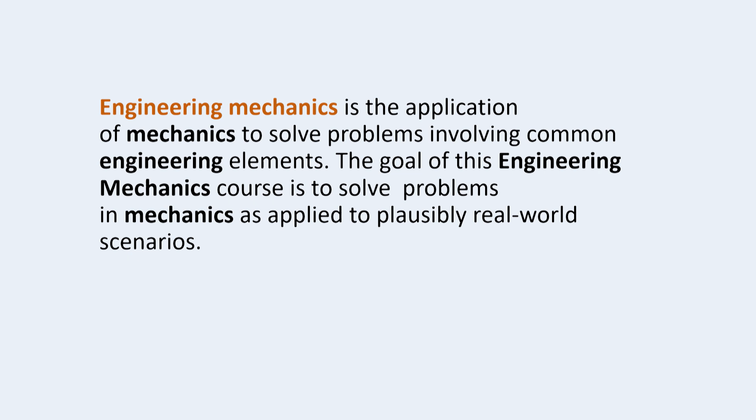So engineering mechanics is a very important course for engineering in the departments of civil, mechanical, aero, chemical, electrical and so on. Engineering mechanics is the application of principles of mechanics to solve problems involving common engineering elements, in the sense of rods, beams, wheels, plates, and so on, because together they make the structure, together they make the machine.

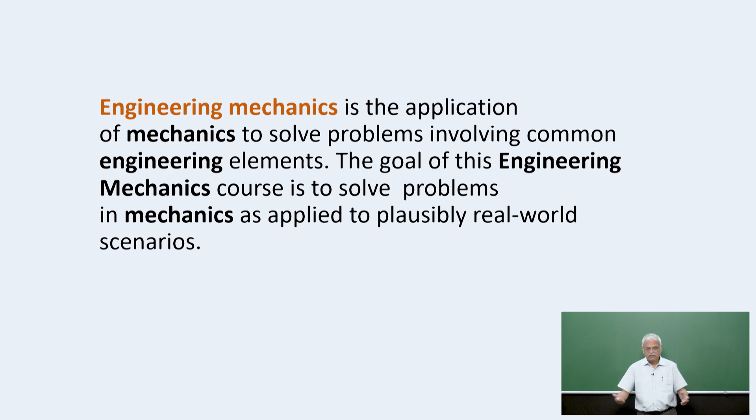And the goal of this course is to solve problems in mechanics as applied to plausibly real world scenarios. So essentially this is the application of principles of mechanics to many of the engineering problems. And this forms a very core course in engineering, and so I just gave the course content here.

The course content has many chapters or topics, starting from equilibrium of rigid bodies in the static case, and then we also deal with the free body diagrams, and the system of connected bodies is the final goal for us, and of course continuous systems. Then we deal with the energy in a conservative system for both rigid bodies and particles. Then there are other principles such as virtual work, which is the other side of the mirror of the basic Newtonian mechanics.

Then we go on to the various coordinate systems, cylindrical coordinates, spherical coordinates, and moving axes for the application to motion. Then, from simple particles, we move on to rigid bodies, and rigid bodies have their own extra difficulties and aspects, and we deal with them at the 2D and at the 3D level also. Going from 2D to 3D is a big jump, and there are many aspects that need to be considered. So this is in a nutshell what we are going to deal with.

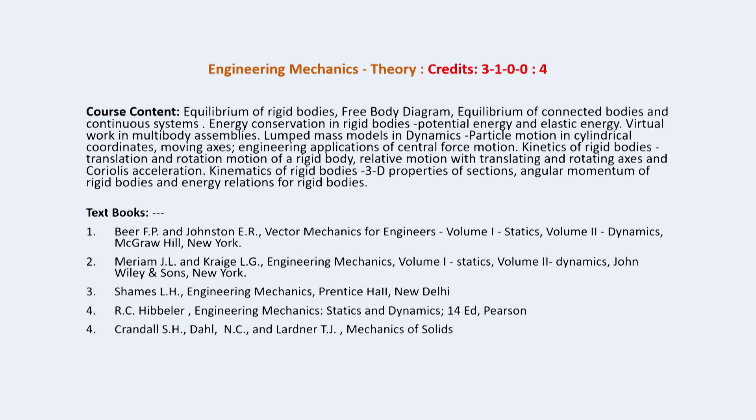Usually we teach it over 14 weeks in the institutes, and it has 3 lectures followed by 1 tutorial in the week. So it's essentially about 40 lectures with 14 tutorials in between. So it's a very rigorous course, and one should pay full attention to it. It is usually 3-1-0-0, three lectures and one tutorial. And of course, there's no lab. Usually it's given 4 credits. So we'll deal with engineering mechanics for some 39, 40 lectures in the coming weeks. Okay.

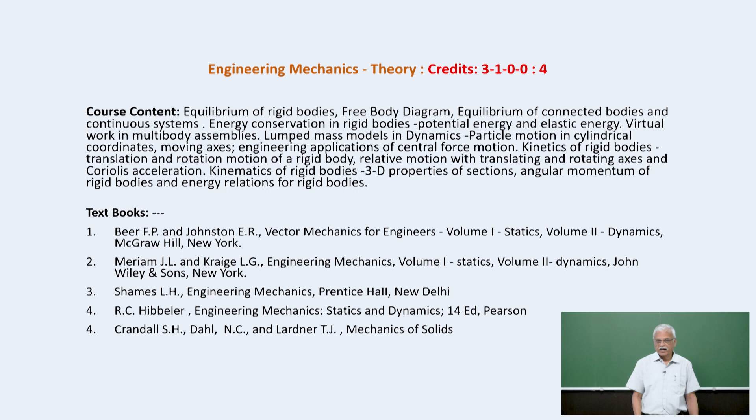Let me also tell you, the contents of this course, which I have shown there, are very general and are prescribed in various institutes, colleges or universities. In general, we can say this covers some 80 to 90%. Sometimes it's more, and it is a little more than what is prescribed in many of the universities. In fact, that is the better part of this. So if you have full command of this course as it is given here, you can say that you have understood dynamics or engineering mechanics at this level to a very good extent.

It looks like a static structure, it doesn't move, but while designing these kinds of structures, not only do they have to take care of all the loads coming on each and every component, but also the kinds of loads. Not only its own self-weight and the weights of people transiting through it, as well as many equipments, but also other kinds of loadings like wind loading, and definitely seismic loading, the vibration which comes during earthquake movements. All these things have been taken into account in designing the whole structure, because it involves not only the safety of the building itself, but the safety of the many people who occupy it.

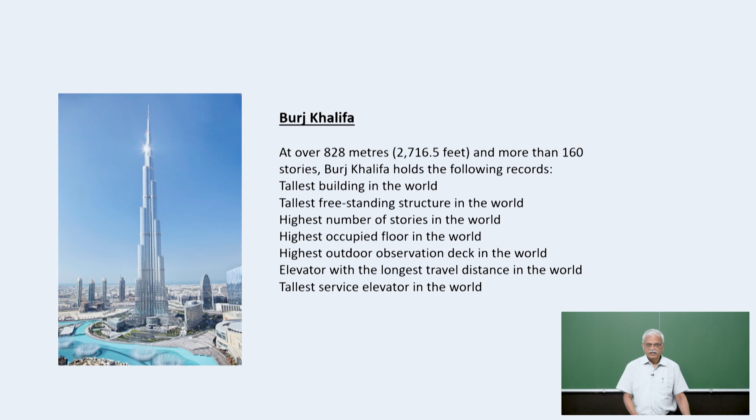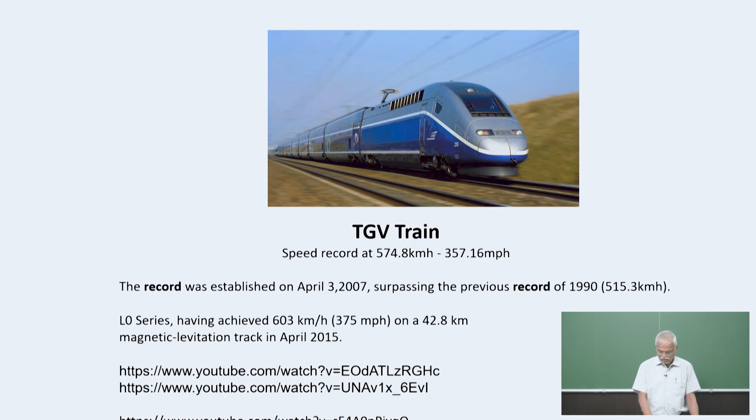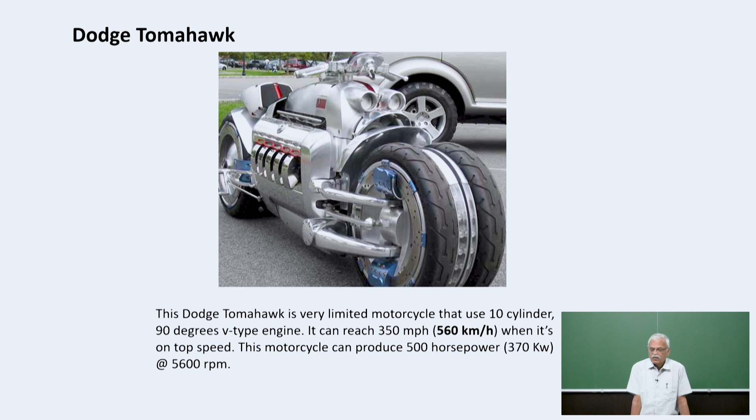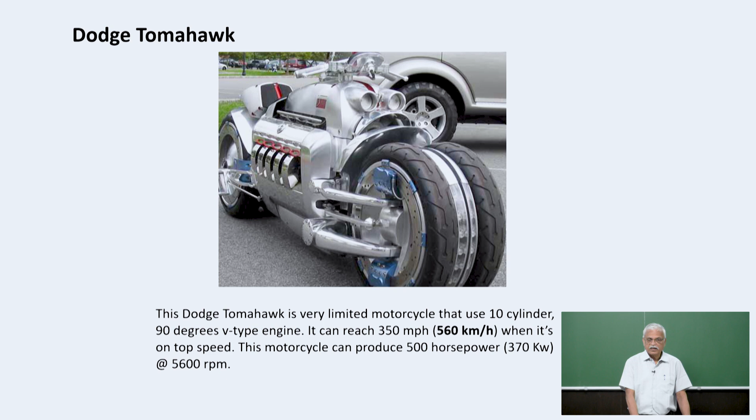And on the other hand, we also have motorcycles, like the Dodge Tomahawk high-speed motorcycle with 10 cylinders, and it can reach a speed of 560 kilometers. So you can imagine how much design analysis would have gone into this to make each and every component work to satisfaction.

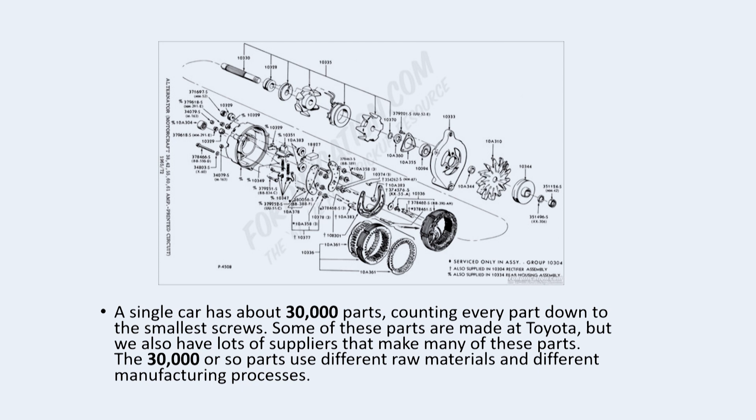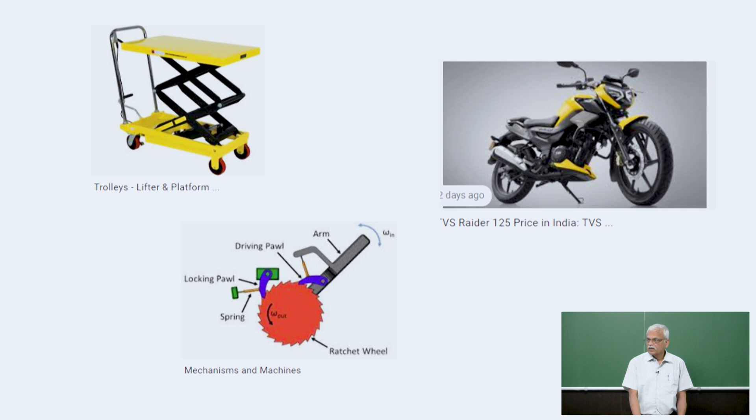And statics is the situation where the motion is not very much involved and it's not significant, like a state of rest, or maybe the motion is of very low velocities or low accelerations. But then there are machines or bodies which are subjected to high accelerations during their course. In fact, they're meant to go through a lot of acceleration. So just to have some idea about the magnitude of acceleration in various

situations. For example, for people, g is the acceleration due to gravity, the standard measurement, and 0.001 g, that means 0.1% of g, is perceptible by people. And at 0.02 g, if a person is subjected to this kind of acceleration, people may fall. For example, if somebody is standing and suddenly a gust of wind comes, and an acceleration of 0.02 g is impinged on his body, then he will lose balance.

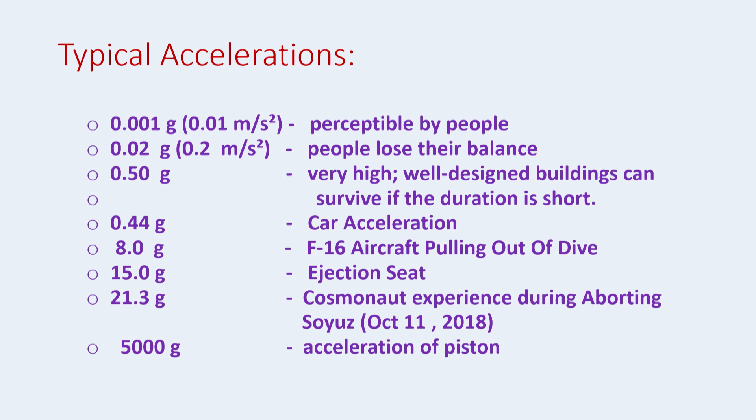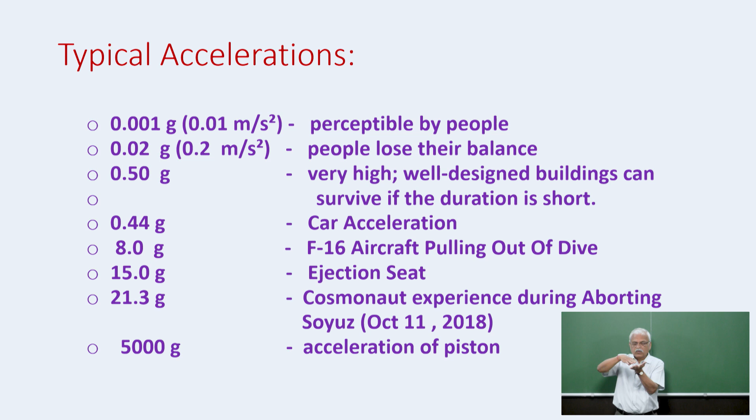The third one, 0.5 g, is the maximum acceleration a building can be subjected to during an earthquake. While the base is moving horizontally back and forth, the maximum acceleration the building can sustain is about 0.5 g. Anything more than that, the building will collapse, because buildings have a lot of bricks and mortar, and those joints cannot take more than 0.5 g. And the car acceleration is about 0.44 g.

And you would have seen fighter aircraft, which undergo high g during acceleration, deceleration, as well as taking a curved path. The maximum a person can sustain is about 8 g. Anything more than that, he may lose consciousness, which they call blackout, and he will lose control. So that is the maximum acceleration a person usually can sustain without losing consciousness.

And then of course, there are the ejection seats in the fighter plane, by which they evacuate the plane in case of emergency. That is about 15 g. He has to come out of the plane for safety reasons, and just for a short time he can sustain it. He may lose consciousness, but not for long. And then he'll come out and land using parachutes. And 21.3 g is what cosmonauts experienced during aborting. In space vehicles, they are subjected to very high accelerations during aborting.

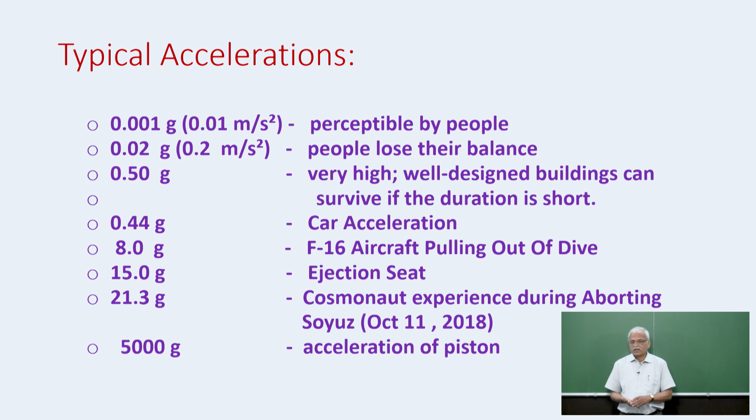And finally, these seem to be very big, but if you come to machines, there are high-speed reciprocating engines which run at 5,000 rpm or 7,000 rpm. There, the piston, which has a reciprocating motion, is subjected to an acceleration of 5,000 g. So this is a very high thing. That acceleration obviously is obtained by the application of force, so you can imagine what kind of forces the pistons are subjected to. So when you design these things, you should definitely make sure that the bodies can sustain that kind of loading, forces.

So this is how we can see the importance of mechanics, either from the statics point of view or from the dynamics point of view, what kind of forces they are subjected to. So we can have some idea of this. Okay, so the mechanics which we are going to deal with has different classifications.

So of course, I already mentioned that there is statics and dynamics, which I did not mention here. Statics is when the motion or the accelerations which are involved are not there, or even if they're there, they're negligible. So static structures are static. There are so many static mechanisms.

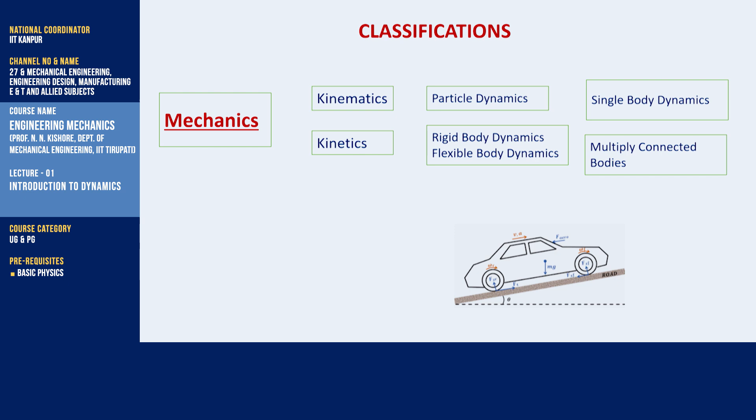Okay, so can we consider a rigid body as a particle in some situations? There are two important aspects for this. The first one is that if the rigid body is not having any rotation, that means it's moving parallel to itself like this, then we can consider it to be a particle, because no rotation is coming into the picture.

You can treat it as a particle. So that means when rotations are not important or they do not enter the analysis, then you can consider it to be a particle. But on the other hand, if you consider it to be also having a rotational thing, then it should be considered as a rigid body.

So interestingly, there are cases where a body can be considered as a particle or should be considered as a rigid body. For example, if you take an aeroplane which is going over long distances smoothly, say Delhi to London or so, in which case more or less its orientation doesn't change, or even if it changes slowly, it goes over long distances of thousands of kilometers without too much rotational motion. So in an overall sense, considering the overall drag, and if you want to find out how much fuel is consumed and so on, in that context it can be considered as a particle.

But on the other hand, if you take the wing and the tip of the wing, which can have displacement or deflections of half a meter or so, if you want to consider that motion, with respect to the size of the wing the motion of the tip is considerable, because it also has kind of up and down rotational motion and so on. Their vibrations, for example. So it should be considered as a rigid body, not necessarily rigid. Okay, so like this, a thing which you consider as a particle or a rigid body.

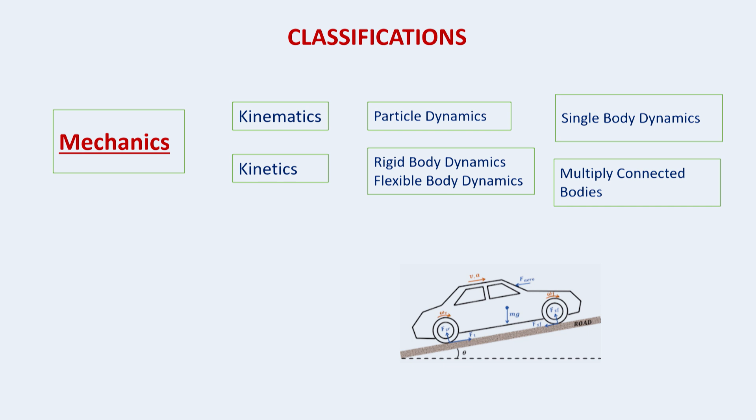So it's very interesting that, I'll come back to this one, I just want to show you that if you look at Newton's laws of motion, the basic laws, the first law talks about how a body continues to be in a state of rest or uniform motion unless it is acted upon by forces.

So essentially there are many slight differences in the definitions. The velocity of a particle can only be changed by the application of a force. So if a force acts on a particle, then obviously its velocity changes. The second law talks about the relationship between the force and change in velocity, which is given by acceleration. So it is F is equal to ma.

And the third one talks about the interaction between bodies. Actually, any force here in the world is because of the contact nature. So if two bodies are pressing each other, there's a contact force, or even the weight which is acting on the body is nothing but an interaction between the body and the earth. So everything is contact forces. One is called the action, the other one is called the reaction. So action and reaction appear as pairs, and they're equal and opposite. So you know these three laws.

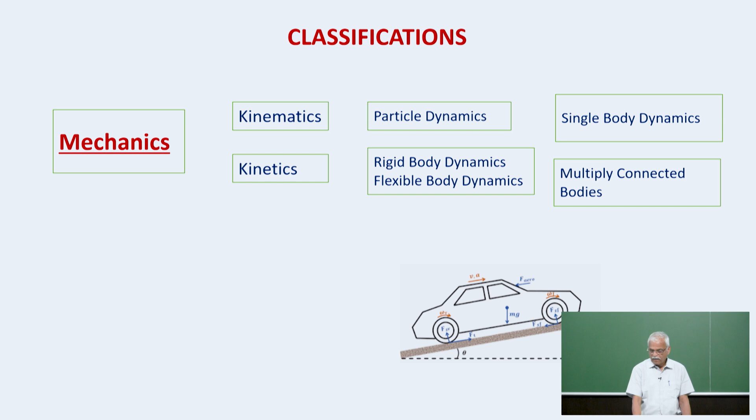So we develop it from particle to multiply connected bodies, and since we know the forces at multiply connected bodies, we'll go back to a single body and probably to internal forces, which we don't do at this stage. So this is how the various stages of understanding the behavior of bodies are classified.

So just to put it in a nutshell again, in this course first of all we talk about static equilibrium, without any motion. We consider the static equilibrium of bodies or multiply connected bodies, a system of bodies, and try to understand the various forces acting. After that, we move on to the kinematics of the particle, how the motion can be described in various reference coordinate systems: Cartesian, cylindrical, spherical, sometimes moving coordinates.

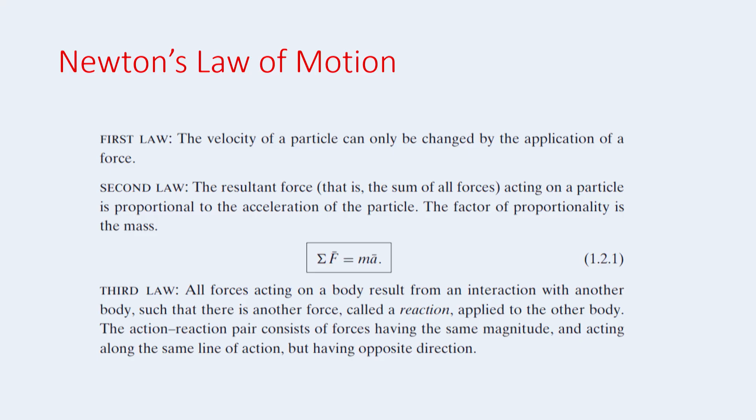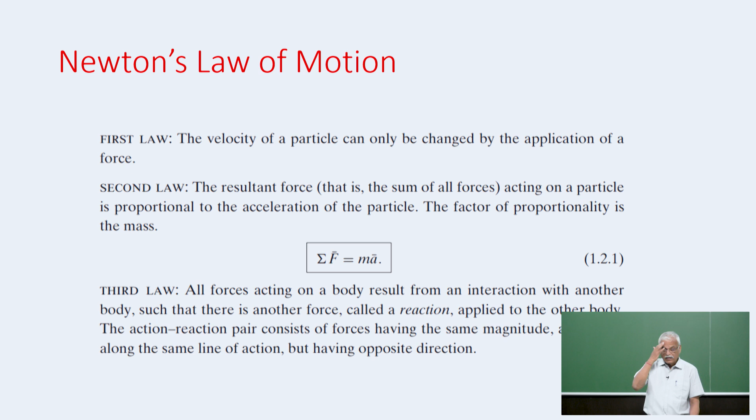Then we move on to the rigid body, where bodies have size and shape, and we deal with kinematics and kinetics of two-dimensional bodies and three-dimensional bodies. 1D you have analyzed to a large extent in your school days, and now we do it more systematically in a vectorial sense. I have to emphasize that we deal with all quantities, forces, as vectors, and all our equations are in vectorial form. So we go from statics, particles to bodies, to dynamics, particles and bodies.

Nowadays bodies are subjected to significant forces and undergo a lot of motion, particularly machines. So the optimization of these bodies depends very much on the forces acting, the accelerations they are subjected to, and how the internal forces are distributed. That may be in the next course. As far as this course is concerned, we deal with particles, rigid bodies, and multiply connected bodies in 2 dimensions and 3 dimensions.

So I'll stop here, and we will continue in lecture 2 on static equilibrium. We'll start with the static conditions, and then analyze the equilibrium.